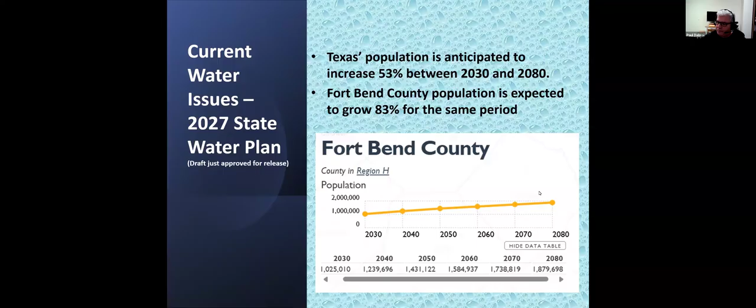The Texas Water Development Board updates their water plan every 5 years. The most recent plan, dated for 2027, was just published last week. So I've updated the next 2 slides with that information. You'll be provided with a link to this report as well when you receive your email.

So projections for water needs continue to outpace availability for the next 30 to 50 years. Now, as shown in this chart, this could occur sooner in Fort Bend County, indicated by the purple bar in each of the graphs. You may have even heard of proposals recently for saltwater desalinization plants in the Galveston and Corpus Christi areas. So if you're going to use irrigation, it's important to use it responsibly.

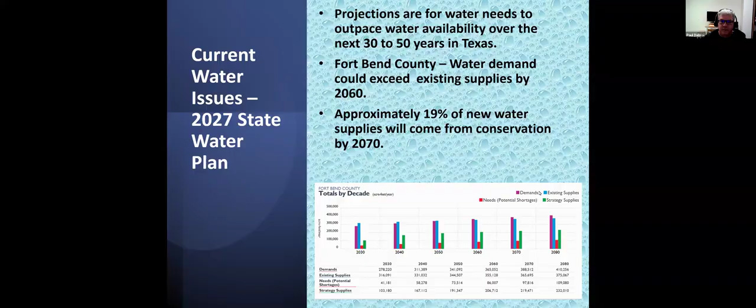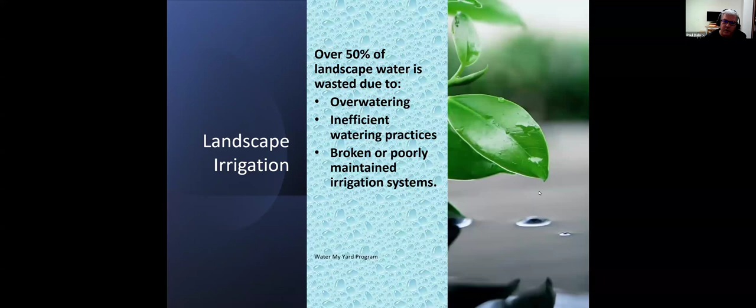Now, the Water My Yard program estimates that over 50% of landscape water is wasted due to several factors, including overwatering, inefficient watering practices, broken or poorly maintained irrigation systems.

Now, our landscapes must conserve water to be efficient while reducing waste and making the best use of limited resources. It's said that a well-designed landscape can improve property values by up to 12 to 15%. So ideally, future landscapes must conserve water to be sustainable. Under ideal conditions, if you have the opportunity to consider irrigation efficiency in the design process, your irrigation system will be that much more helpful to you.

Efficient irrigation prevents waste and overuse, and allows you to do more with less. And like a lot of things, your landscape doesn't waste water, people do.

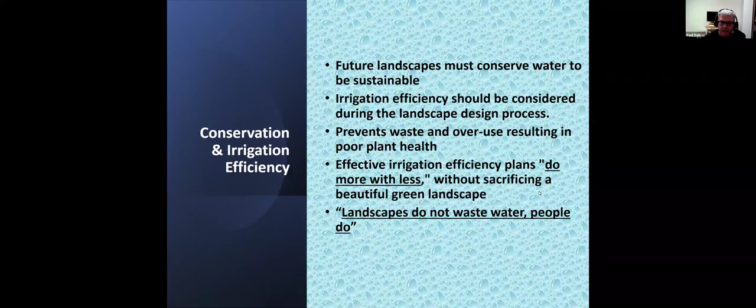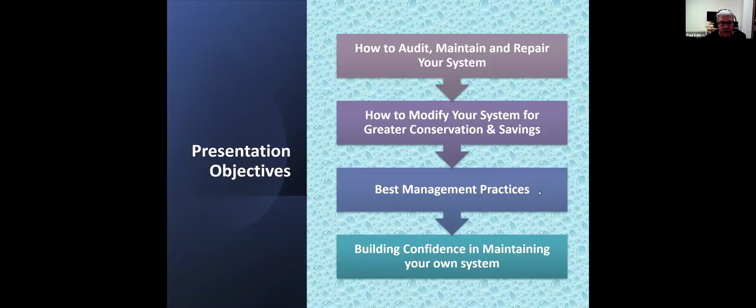So there's four main objectives to this presentation. By the end of the presentation, we hope to help you understand how to audit, maintain, and repair your system, explain how to modify your system for greater conservation savings. We'll review some best management practices and increase your confidence in maintaining your own system.

If I was going to list three main points for this presentation, it would be these three, and these will be reinforced continuously as we move through the presentation. First, water only when needed. Second, apply just enough water. And then third, maintain your system.

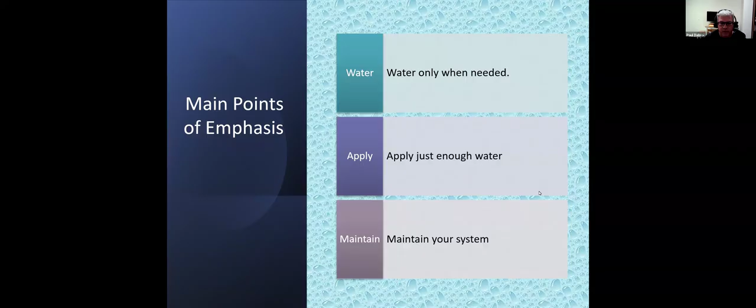A little bit more on irrigation efficiency. Peak watering months in the summer are considered May through October, and during that period, water usage can increase 35 to 70%. Now, it's estimated 89% of homeowners have irrigation systems. That seems like a high number, and that also includes people who just have a hose. And a high percent of those homeowners or renters don't fully understand how their irrigation system works. We hope to help you with that as we move along here.

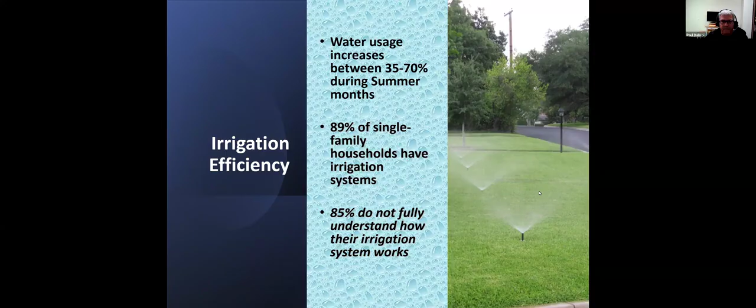The average homeowner overwaters, not because they want to, they just don't know how often, how long, the individual plant requirements, how to consider precipitation, how to set your irrigation controller, and how to maintain the system. This past Tuesday, we received 2 inches of rain at my house. And sure enough, the next morning, as I'm leaving for work, someone on my street had their irrigation system running.

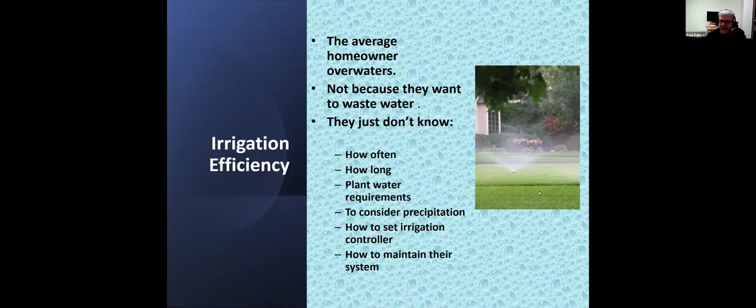So some best management practices. If you need to water, start early in the morning. The sun becomes strong after 8 a.m. You really want to be done by 10 a.m. to reduce evaporation. Best to judge water requirements in the morning before the landscape dries out and shows signs of stress. You want to water deeply and infrequently.

Ideally, you should only water your lawn once or twice a week. You want to water slowly for better absorption. For non-turf areas, drip irrigation and soaker hoses work very well. And we encourage use of the cycle and soak method, which we'll discuss later in the presentation. If possible, try not to water on windy days. Not always that easy. And just a couple facts: an inch of water will generally penetrate to a soil depth of 6 inches.

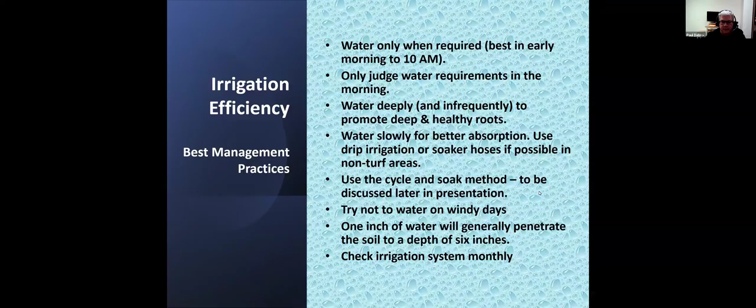Ideally, you should check your irrigation system on a regular basis. Doesn't have to be necessarily monthly, but you want to just make sure that all the heads are popped up, water's being distributed evenly, and you don't have any major leaks. You may have heard this quote before: the best fertilizer is a gardener's shadow. What it means is a little vigilance can help you avoid a lot of problems.

All right, now we're going to get into the stuff, into the equipment. So components of a residential irrigation system. We are going to begin on the bottom right, and that is your backflow preventer. And I'm going to use my pointer here. Here we go. And this is a one-way check valve that prevents contaminants from entering your water system.

Next is the irrigation controller, and we will spend a lot of time on this in the next few slides. You have a valve, which controls water for each of your irrigation zones. You have a couple different pop-up sprinklers here. This is a rotor type sprinkler head, and these are pop-ups of different lengths. The shorter ones would be used on your lawn. The taller ones would be used on, say, planting beds. And then we have some commercial drip irrigation and the various PVC fittings that go along with this system.

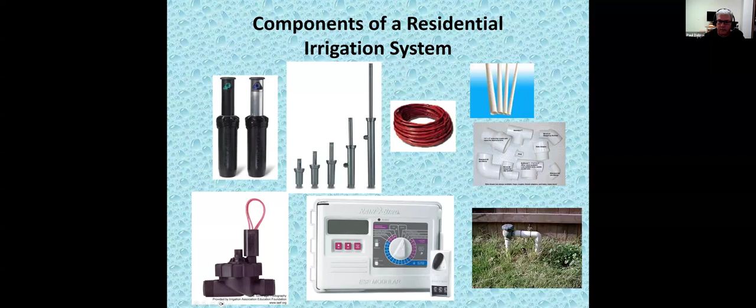Okay, irrigation controller. This is the brain of your irrigation system. Now, as I prepare for this presentation each year, I try to get out to the home improvement stores and see what kind of controllers are available. And what I'm noticing is more and more controllers look like this little one here on the right, in that there's literally no buttons on it.

A lot of controllers now allow you to do 100% of your programming through the app, with only very bare minimum controls on the controller itself—on, off, some manual run features—but the majority of the programming is done through your app. Now, for demonstration purposes, the controller that we're looking at here has all the features that a typical controller will have. And for visual effect, we're going to focus on the features, not so much the device.

So this particular station here, this particular controller has 22 zones. Now, if you have a yard with 22 zones, congratulations, but that is a lot of water to use.

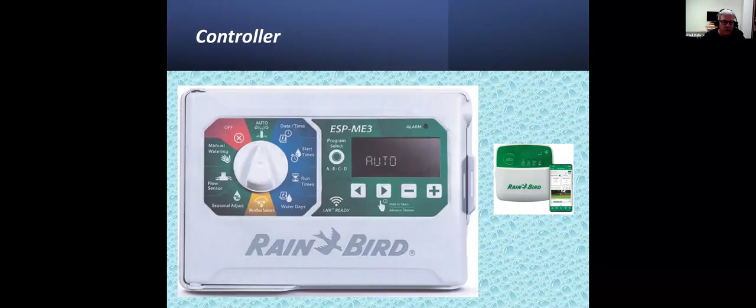So what we're going to do is go around the dial here and describe some of the features on the controller. We're going to start in the upper left-hand corner.

The red X means off, my favorite setting. This is often an overlooked option. As we go through the presentation, we're going to reinforce the fact that your irrigation should supplement natural rainfall. And if you don't need to water, then turn it off.

Your auto setting is basically, after you've programmed your controller, setting it to auto will allow it to run at the predetermined dates and times.

The blue buttons here are just your basic settings: current date and time, when you want your controller to start, how long you want it to run, and on which days.

If you have a smart controller or an ET controller, it can be controlled by an external source of data, and you would set it to your weather sensors.

Seasonal adjustments allow you to reduce the amount of water during non-peak periods. For instance, May through October are the peak watering periods. Now, if you have your controller on in March or April, you could set it to 75% of your normal runtime, and that would be appropriate for that time of year. Same with after October, if you were to run your system.

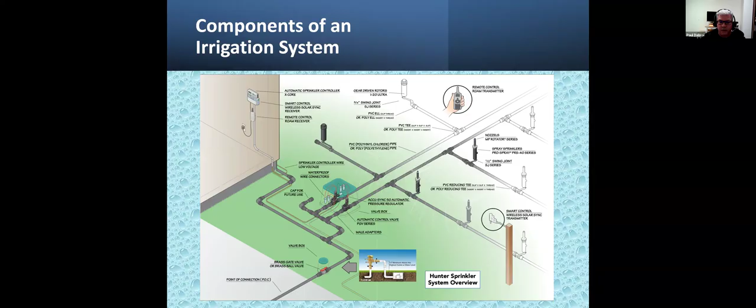All right, the first is your shutoff valve. You may or may not have a shutoff valve in your system. If you do, it may be buried in your landscape. If you don't have a separate shutoff valve, you can always shut off the system through your backflow preventer.

Your valve boxes. This one here has a green square cover. Mine all have green round covers, and you could have more than one zone under each valve box. My system has 6 zones, I have 6 valve boxes, and the valve is what controls water to the sprinkler heads within that zone.

You'll notice here there's an extra spur, which could be used for future expansion. You could even use it for a dedicated zone for drip irrigation. If your builder or developer had the foresight to do this, probably a little bit ahead of the game.

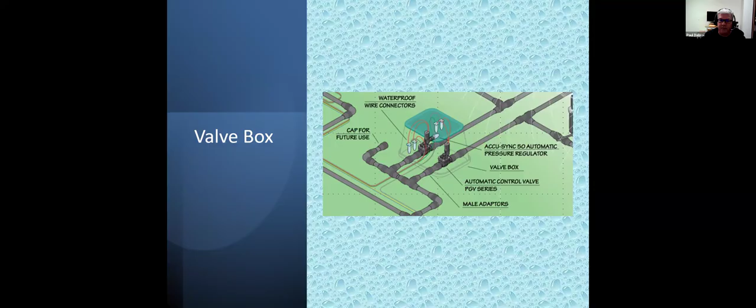Spray heads. You could have pop-up rotors, you could have pop-up traditional spray heads. These have a flexible type connector.

And in this particular system here, they've circled this wireless solar sync transmitter, which is connecting this particular controller to an external source of data.

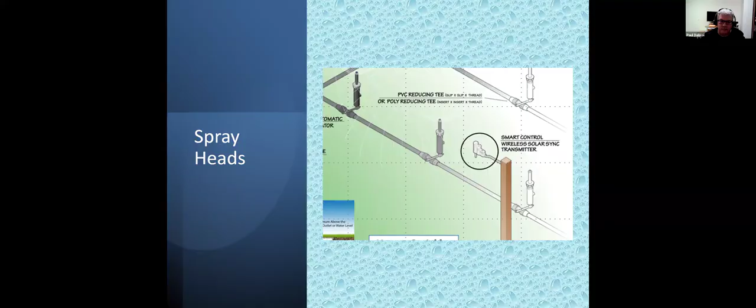This is an illustration of a rotor type pop-up, and then the controller itself. Now, some controllers are designed to be mounted outside the home. They usually have a more robust casing with a cover. This is usually very, very specific, and that option would be clearly marked on the controller itself for indoor-outdoor use. Honestly, not sure why you'd want to use it outdoor, but it can be an option.

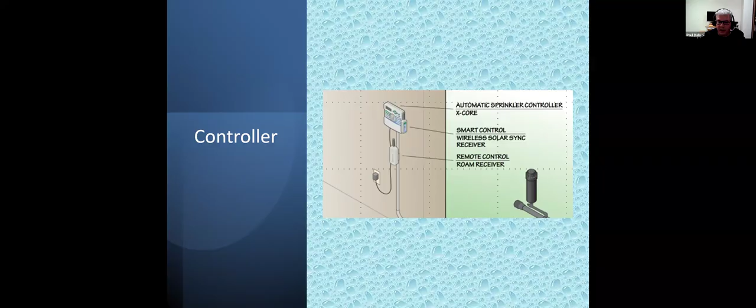All right, so when you look at the different sprinkler heads or irrigation methods, in order of most efficient to least efficient, drip subsurface is always going to be your most efficient. You're applying water close to the root zone of the plants or planting beds.

And they apply water at a lower rate, but with larger droplets, and that allows you to water, let's say, hillsides or slopes. There's heavier drops, so less prone to blowing in the wind, and it allows the water to sink in a little faster.

Your rotors, 65-70% efficient. Rotors put out a lot of water, typically used on larger turf areas or public areas, and then your spray heads at 50%.

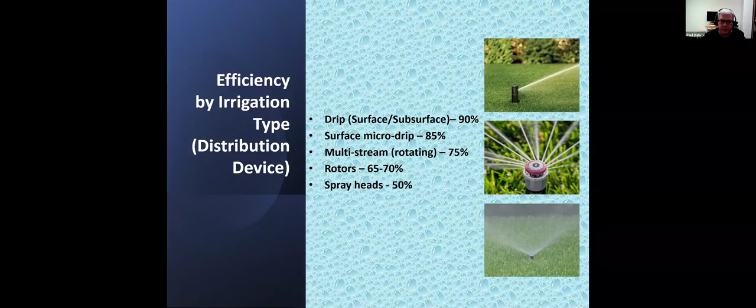We'll spend a little bit of time here on drip irrigation, and after this section, we'll take a few questions.

Drip irrigation is the most efficient form of irrigation. It can be used on entire landscapes, though I have never seen it used on a lawn. The difference between drip and micro drip — we have some examples in the next slides.

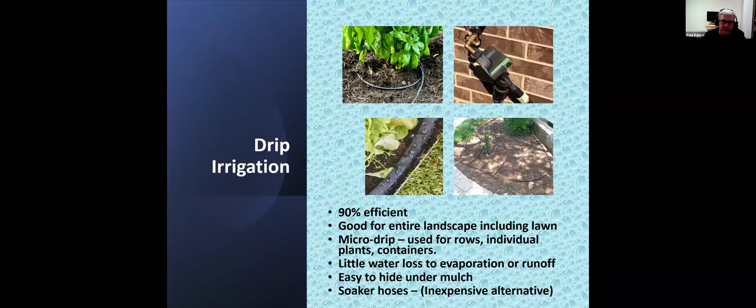At a presentation I attended, the presenter used micro drip in his raised beds. The reason he used the little sprayers was it gave him a better sense that it was working properly, since you could see the water, versus just drip tubing on the soil, which is a bit more difficult to check.

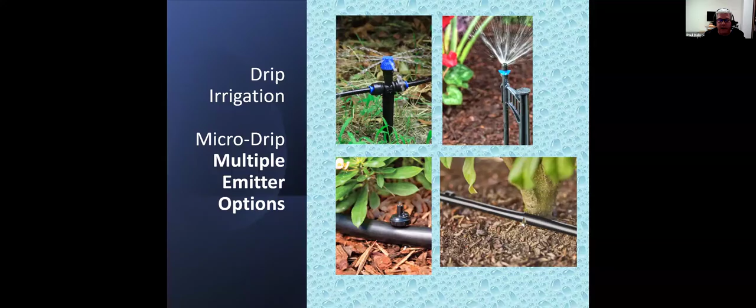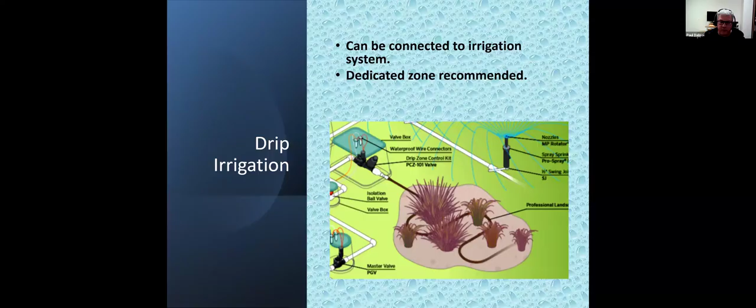All right, so next we're going to get into system audit and repair. But before we do, I want to see if there's any questions right now. No questions at the moment.

Okay, very good. So now we're going to talk about system audit, repair, and maintenance. Now that you know the different components in the irrigation system, we're going to talk about some things you can do to maintain your system.

Number one, you want to become familiar with the basic components. You want to learn how to do a manual station run — if it's easier for you to remember, do it the first Sunday of the month. It takes like 5 minutes. While you're doing the test run, you want to look for some obvious signs.

Even when you're not specifically checking your system, look at the condition of the plants or your lawn. If you have planting beds with a section that looks unusually dry, a perfectly crescent-shaped section of your lawn that looks drier than the others, look for plants obstructing spray. I'm sure when we all bought our homes, they had these nice little shrubs, and you turned on your system and it distributed the water evenly. Well, now your shrub is a full-grown plant, and the spray may be partially obstructed by that same plant.

Misaligned heads — pop-up sprinklers are easily adjustable, and sometimes they end up pointing in the wrong direction. Unless you're watching your system while it runs, you may not notice that. Clogged nozzles can prevent water from being distributed. Broken heads, nozzles, leaks, as well as broken connectors and pipes.

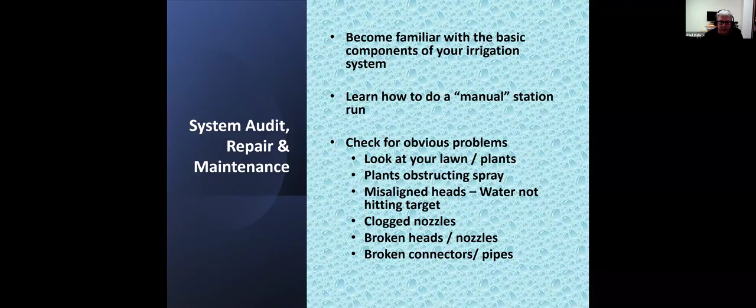Also, if you run your system either early in the morning or when it's dark, you may not see these problems unless you do a special run during the daytime. So keep that in mind as well.

All right, if you need to make a repair, I always say treat it like a medical procedure. Go from least invasive to most invasive, or easiest to more difficult.

So the easiest type of adjustment is when your spray head is not pointing in the right direction. The pop-up sprinklers have a riser that ratchets, and if you hold the body of the sprinkler head and turn the riser, you can usually adjust your direction.

Some rotors have screw adjustments on the top. Next is clean or replace the nozzle. The nozzle is at the top of the riser, and these are replaceable. If they clog or get hit with a line trimmer, or you run it over with the lawnmower, easily replace as long as you don't crack the riser itself.

Sometimes you have to replace the whole sprinkler head. They wear out over time. It's inexpensive and doesn't take long to replace. Or below the sprinkler head, between the sprinkler head and the distribution tubing, you might have a broken connector.

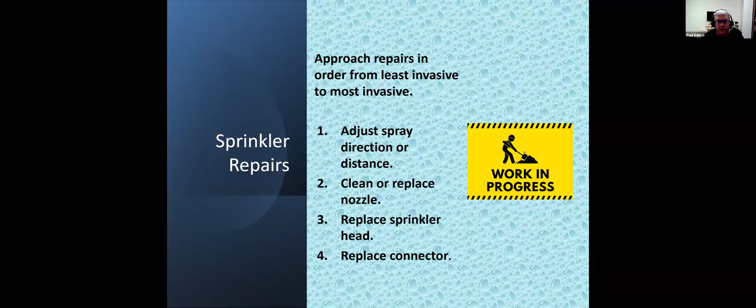All right, tools of the trade. So there's different tools you can buy. If you've ever gone to Home Depot or Lowe's and gone down the irrigation aisle, a lot of these things might look familiar to you.

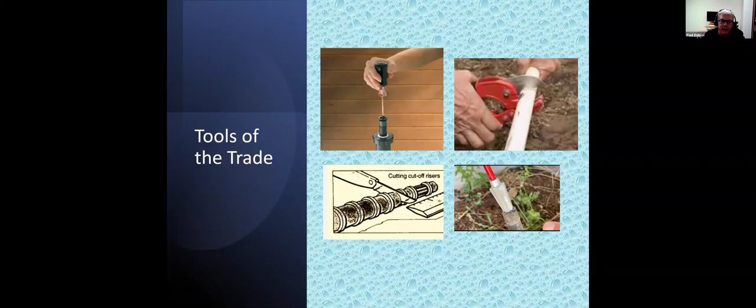Here we show some of those tools in action. Again, the screwdriver adjusting the distance on a spray head, PVC cutting tool, the riser remover there, and then the utility knife.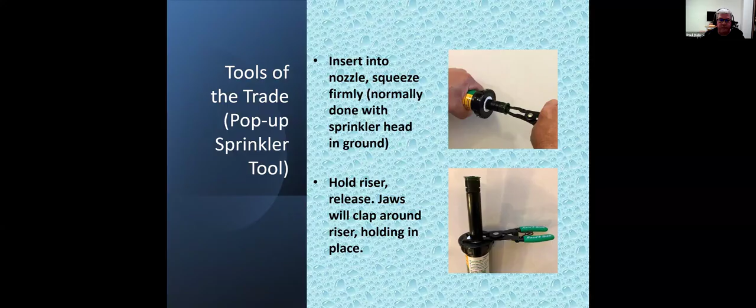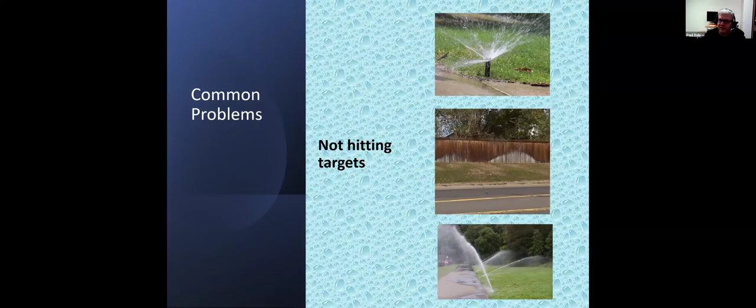Common problems: the most common is water not hitting the target, water where it should not be. Here you can see a pop-up spraying everywhere, almost a 360-degree pattern on the edge of a sidewalk. I'm sure we've all seen those power-washed patterns on fences, which means these sprinklers have been spraying the fence for a very long time, removing the finish like that. This looks like a rotor gone wild. Again, all these things are very easy to fix and adjust.

Also, as you're going about your business through the year, make note of unusual conditions in your yard. If you're walking somewhere and your sprinklers ran a couple days ago, but you have a wet, squishy area, that could indicate you have a leak on sprinklers in that area that needs to be addressed.

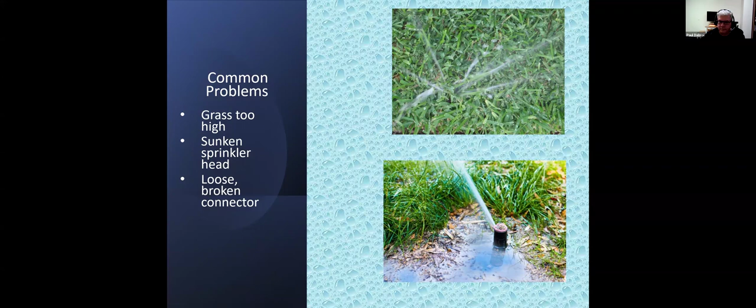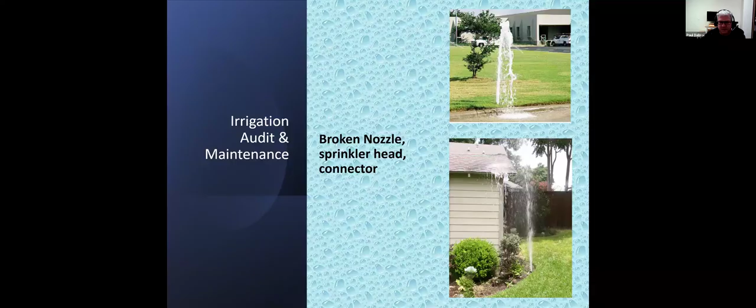Now, if you happen to be driving down your street and you see this happening to one of your neighbors, it doesn't hurt to leave a little note on their door, especially if it's at night and they may not be aware of it.

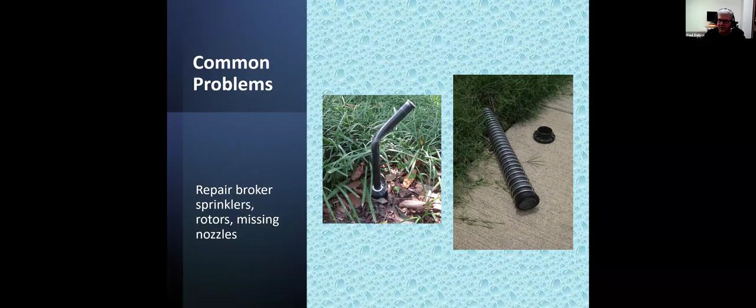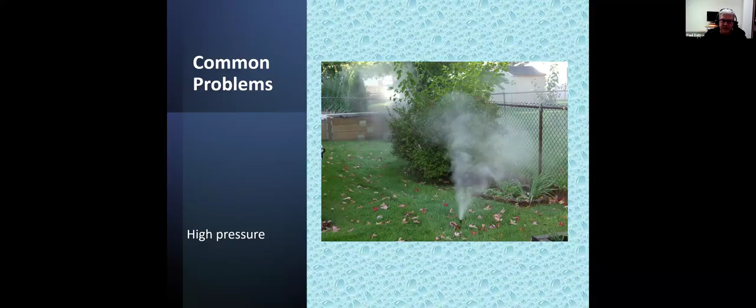And then the last thing regarding maintenance is your backflow preventer.

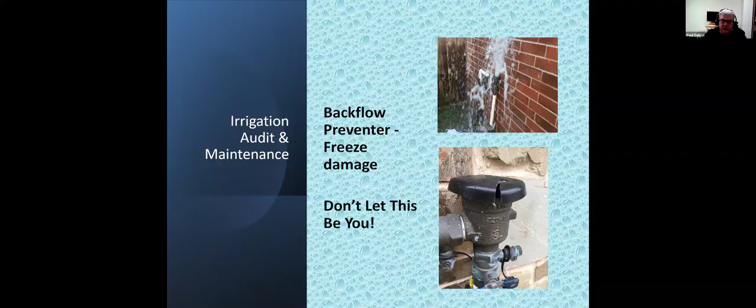This type of cover is very helpful. If you're going to buy something like this, buy it in August when you can find them. If you try to buy it a week before they predict a freeze, it's unlikely you're going to find it. I like to just pick a date to shut off and start your system each year. For me, it's December 1st and March 1st. That way you don't have to worry about it. Once your system's turned off and covered, you'll be good for the rest of the winter.

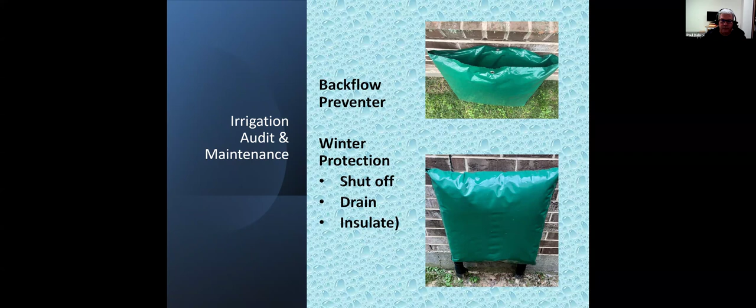All right, so we've talked about the equipment, how to set and maintain your system. So how much water are you using? You really won't know until you measure it. In general, Bermuda needs about 1 inch of water a week, and again it really depends on the conditions, your particular situation. It could probably use a little less than that.

St. Augustine, 1 to 2 inches. Zoysia, about 1 inch. And again, when we talk about the amount of water, that is your combined natural rainfall as well as the irrigation.

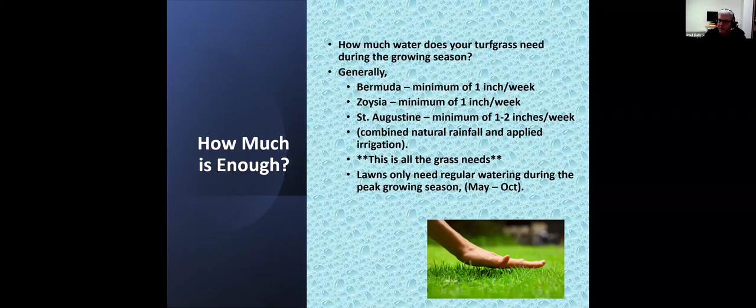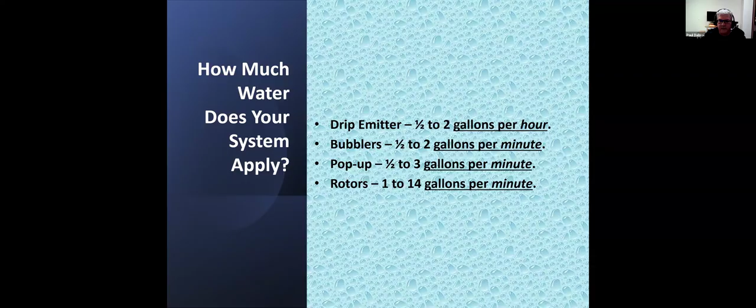Now the emitters all dispense water at different rates. It really depends on the brand, the distance it's intended to cover, as well as the pressure within your system. So these are ballparks, but the important part is actually measuring your own irrigation system.

You can do that with what they call a catch can test. You could use tuna cans or a pet food can to do that. You can also buy these dedicated catch can test kits. This middle photo shows one of the catch cans. It has a little stand and a graduated funnel-shaped beaker thing. You spread these out on your lawn, run each zone for a predetermined period — you want to do it the same for each — and then you can measure how much water was collected in each catch can and calculate your overall water use.

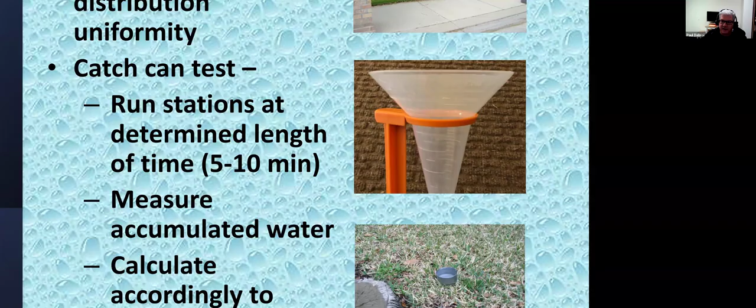I am going to use the zoom here. You'll notice on the dedicated catch cans, they allow you to easily measure very small amounts. Using a can at the bottom, it's much harder to measure an eighth of an inch than if you were using one of these catch can funnel things.

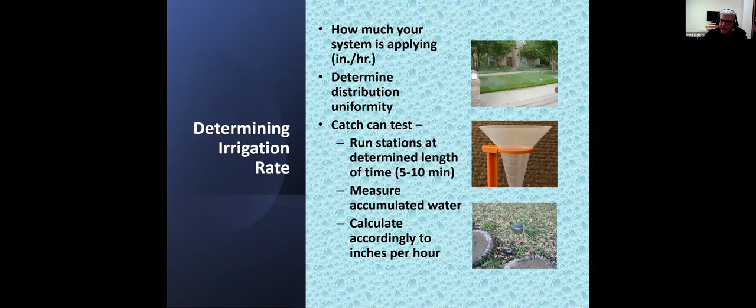So once you've run your station, let's say for 10 minutes, and you've recorded how much has been captured in each of the cups, now you're going to calculate how much water your system is putting out. We're going to do a little bit of math here. This is from the test I ran last year, and this also highlighted a couple of coverage issues too that I had to address.

I did this in my front yard, and I had 9 different measuring points. I ran the system for 10 minutes, and I captured between, let's say, 0.38 inches and 0.09 inches in 10 minutes. So what you do then is add up all those values, and that came to 2.15, divided by the 9 different cups. That gave me an average of 0.24 inches for each. Divide that by 10, and that tells me on average that zone was putting out 0.024 inches of water a minute. Now if I multiplied that by 60 minutes, that would be 1.44 inches.

So for that particular zone, I would need to run it for 42 minutes to get an inch of water. And that could be 42 minutes once a week, 4 different run times, or you could split it up a couple different times throughout the week. So once you've measured your irrigation rate, this will help you know how long to run your system to get that 1 inch on average that you need to support your lawn.

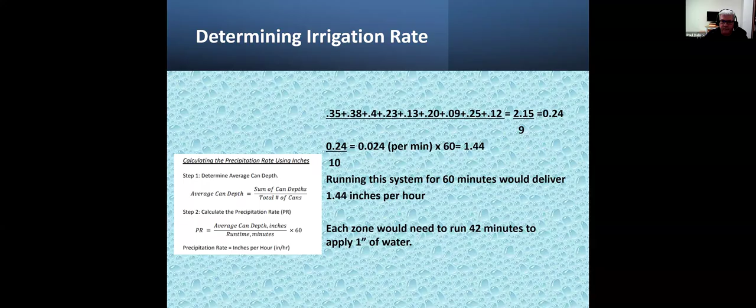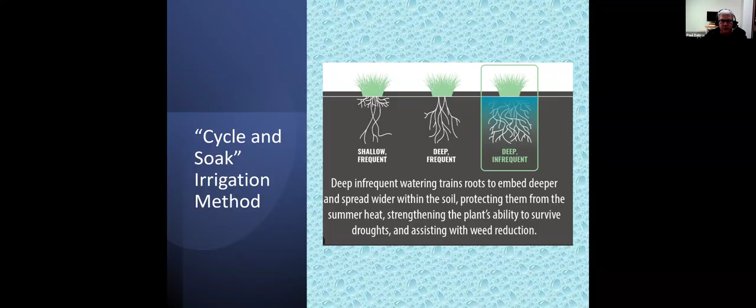All right, cycle and soak. So cycle and soak means watering multiple times for short durations. This illustration shows the differences between shallow watering and deep and frequent watering. If you water infrequently but deeply, your roots are going to follow that water, and it allows your lawn to better endure drought periods, and it'll create a much healthier lawn.

Cycle and soak can be used on any type of soil, but it works best on clay soils and slopes where absorption can be a little slower. You can use it on your lawn and your landscape beds. What you want to do is run each zone multiple times for short intervals.

Let's just say you were going to run your system for 20 minutes. The easiest way to look at this is to break it up into 4 cycles. If your intent is to run your system for 20 minutes, have 4 cycles of 5. Have a break between those sessions to allow the water to be absorbed into the soil before the system runs again. Some controllers will allow you to use multiple start times for each zone. Some really just have a setting where you click it for cycle and soak, and you tell it how long, and then how much time in between - meaning, I want each zone to run for 2 minutes and then a 3-minute break in between. The new controllers make it much easier for you to do that.

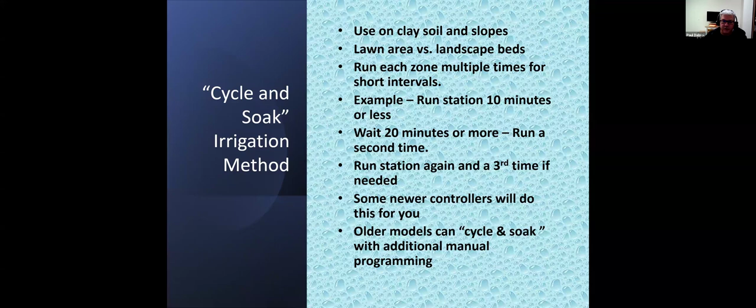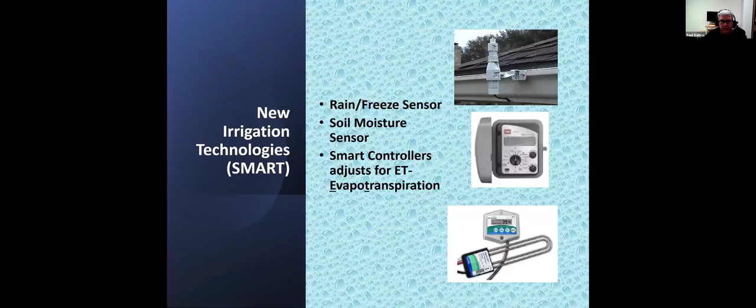All right, so there are some newer irrigation technologies out there, including soil sensors. There are sensors connected to external sources of data. You may have heard the term ET controller, and ET means evapotranspiration. These controllers could be connected to a system within your own yard, a remote measuring point, or based on historical data. Evapotranspiration is total water loss from an area combining evaporation from the surface of the soil along with transpiration, water escaping from the plant leaves.

Depending on the controller and the brand, some of these are signal-based, where there's a centralized measuring point, hopefully near you, that is capturing this data and making recommendations to your system. Some use historic information, which I would consider least reliable because things change so much from month to month, year to year. So historic controllers are using basically estimates based on historic use in that particular area. I would say the most accurate is going to be on-site - if you're able to measure the conditions within your own yard, you're going to get the best recommendations.

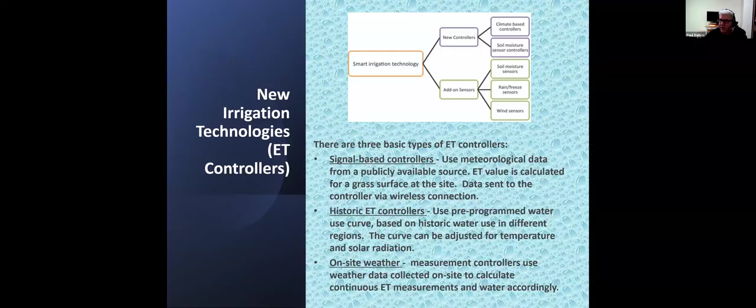I found it to be fairly helpful, although the site will even tell you that you really need to pay attention to your local conditions. I believe the closest monitoring stations to us - there's one in North Richmond right off I-10, and there's one in South Richmond. Neither of those are very close to my house. When we get that sporadic rain during the summer, sometimes I'll get a recommendation to water, and it's like, I had 3 inches last week, because again, the rainfall is measured from a single point.